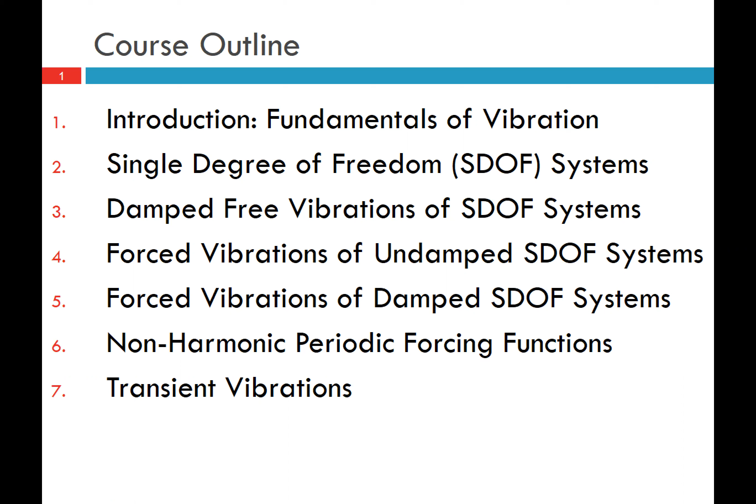So this lecture series will cover 12 chapters. First, we will look at an introduction to vibrations. We will study single degree of freedom systems, damped free vibrations of single degree of freedom systems, forced vibrations of undamped single degree of freedom systems, forced vibrations of damped single degree of freedom systems, non-harmonic periodic forcing functions, transient vibrations.

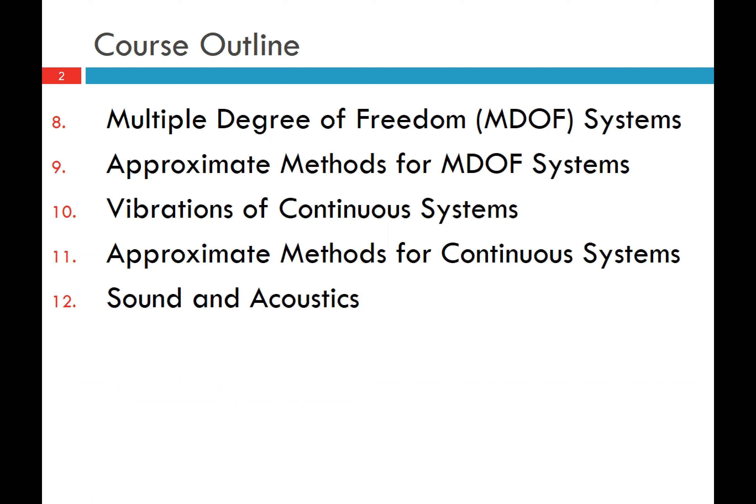We will study multiple degree of freedom systems, as well as approximate methods for these multiple degree of freedom systems, vibrations of continuous systems and approximate methods for continuous systems, and then leave off with an introduction to the concepts of sound and acoustics. So this video is an introduction to vibrations.

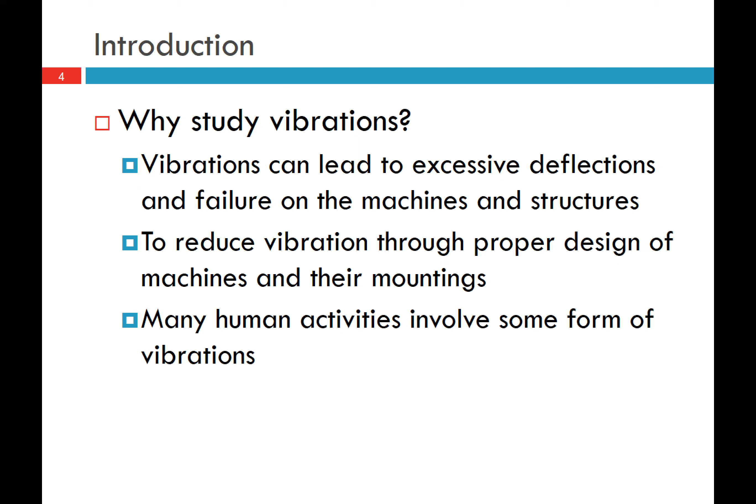So why study vibrations? Well, vibrations can lead to excessive deflections and failure on the machines and structures. To reduce vibrations through proper design of machines and their mountings, it's important that we study vibrations. Many human activities involve some form of vibration. There are also some examples where things have gone quite wrong in various structures due to excessive vibrations.

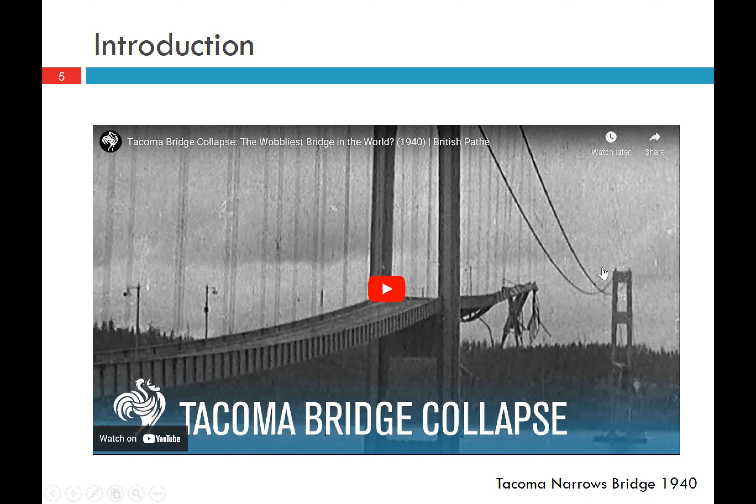So I'm going to show a video here. This is an example of a very famous bridge collapse, the Tacoma Narrows Bridge, which collapsed in 1940 due to excessive vibrations induced by the wind. So I'll just play the video here too, so you can see what happens.

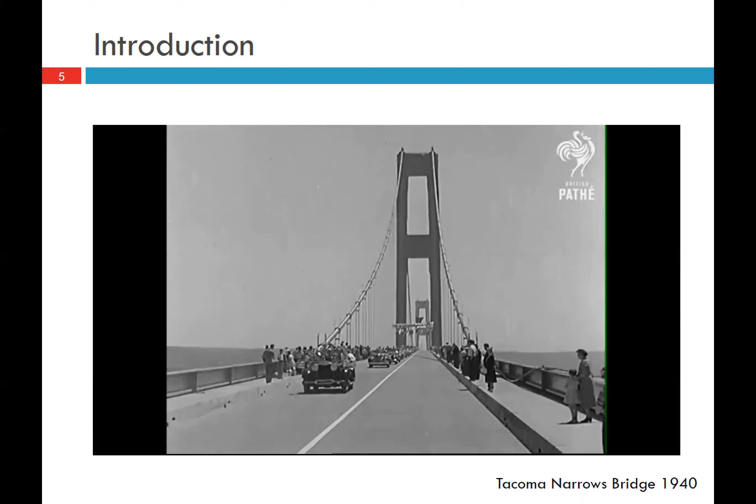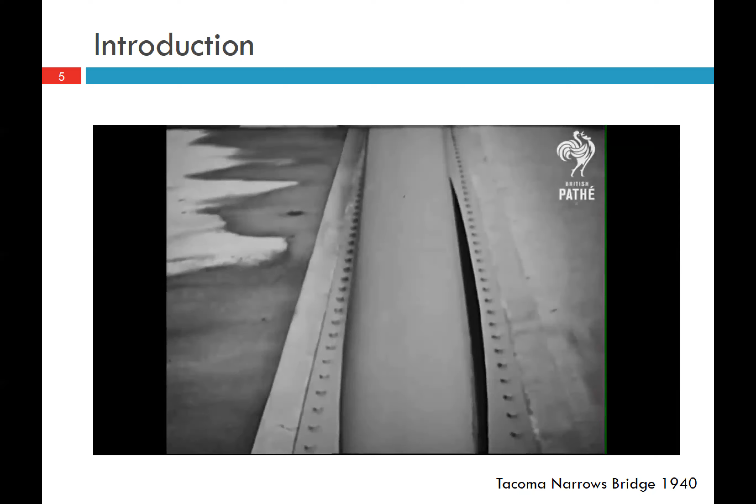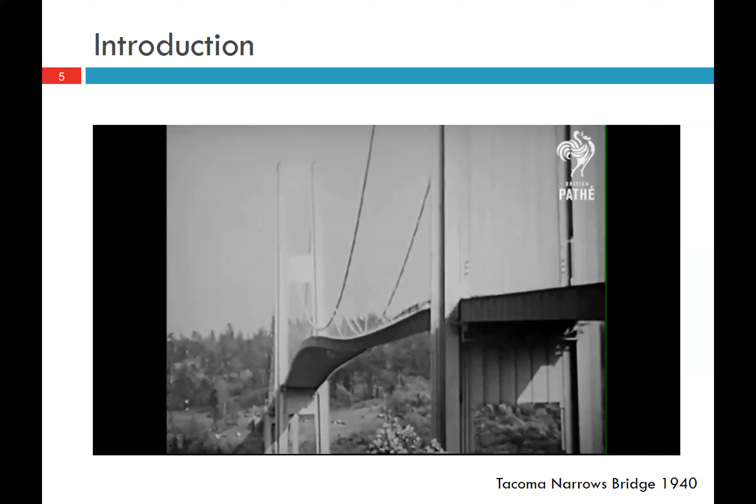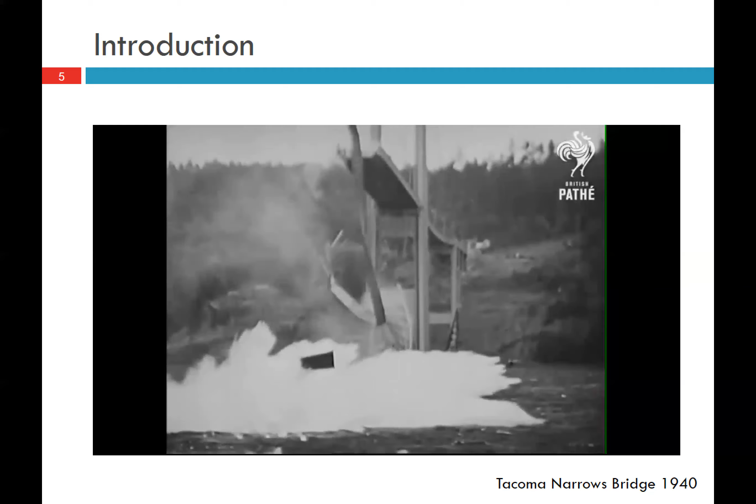Tacoma Bridge, Washington, opened only a few months ago, was built at a cost of over $6 million. But misfortune overtakes the great structure. These are some of the most amazing pictures ever recorded by a newsreel. The actual collapse of the world's third largest suspension bridge. Only a 35-mile-an-hour wind is blowing, but this apparently sets up a rhythmic swinging of the bridge, which increases with each swing. Finally, the swinging road and the suspension cables give way and plunge into the water below. Fortunately, the only casualties were a car stalled on the bridge and a dog.

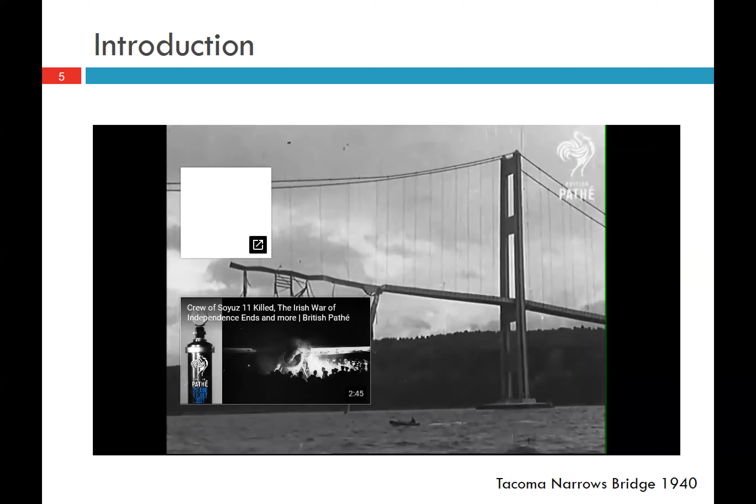So you can see that it's important to have a good understanding of the dynamic behavior of these structures when designing them, and in order to keep the design safe. Here's another famous example. This is the Millennium Bridge in London that opened in 2000. So it was a pedestrian bridge.

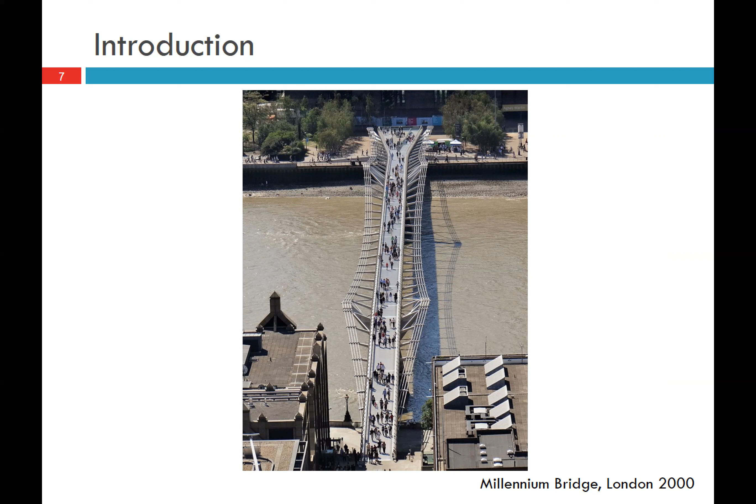The bridge's movements, and I'll show the video in the next slide. But when the people started walking across the bridge, the pattern of their steps introduced some sway in the bridge, and then people started kind of walking in step with the frequency of the vibrations, which just continue to maximize the sway of the bridge. And so you can see what happened there. So let's just play this video.

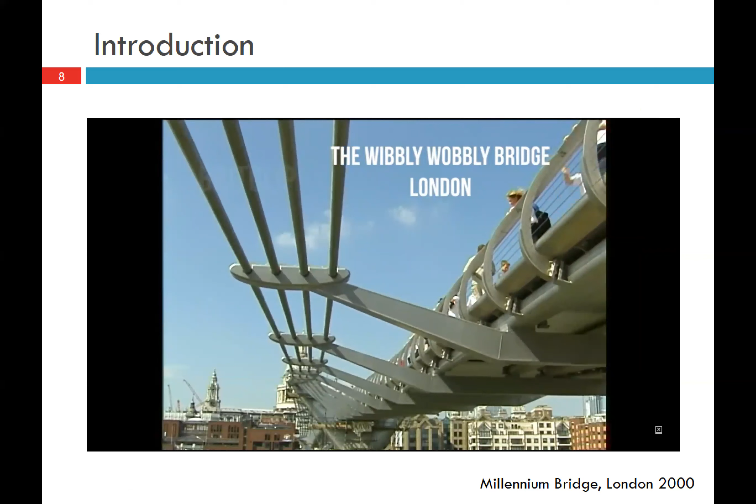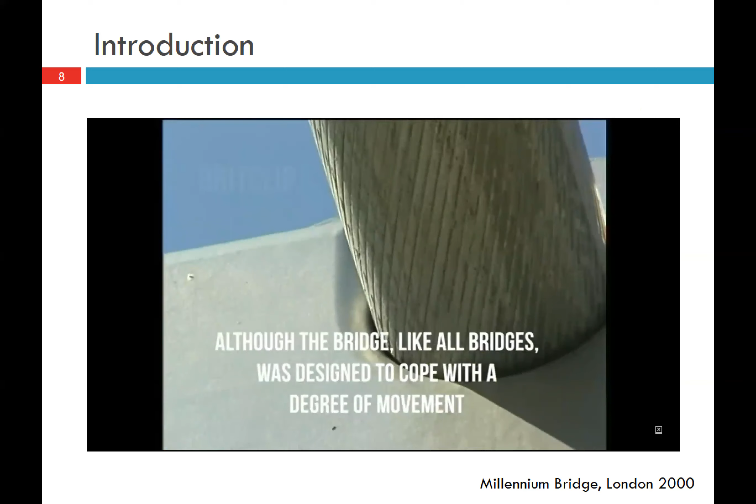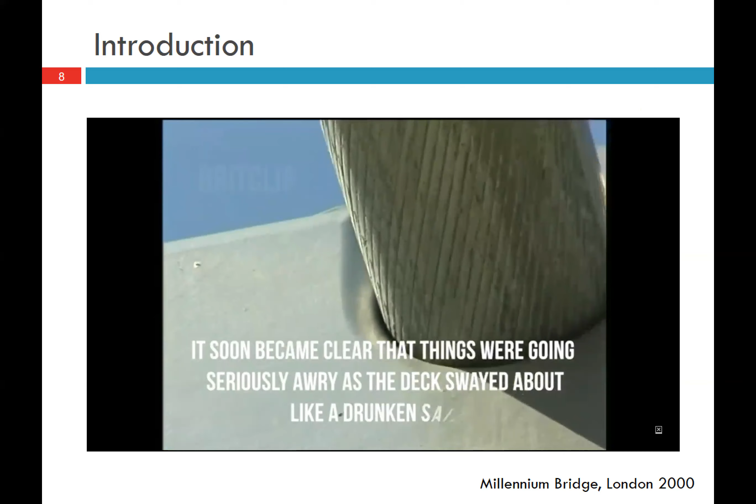So those are some examples of when it's important to understand vibrations to keep things safe, so we don't have excessive vibrations. In other situations, it's useful to understand vibrations as a necessary feature. So we need to understand vibrations for both extremely large structures as well as very small structures. So for example, in like a MEMS circuit, understanding vibrations and using vibrations is really important for their function.

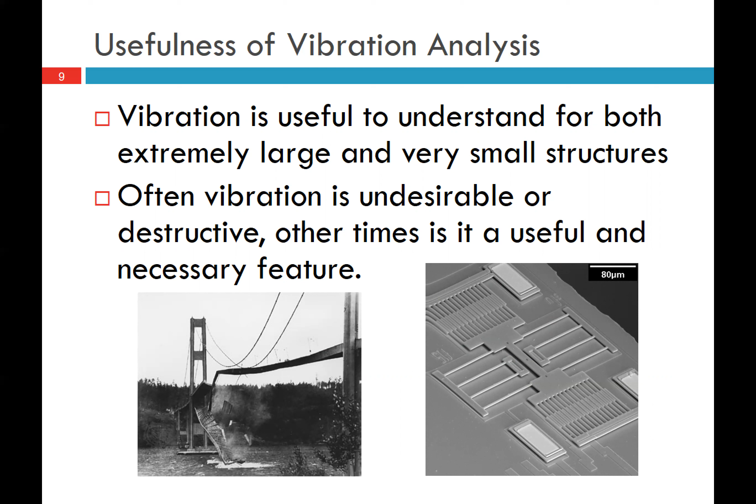So in many of these cases, the goal of the engineer is to minimize or reduce the level of vibration, or design the machine or structure to withstand the vibrations to which it will be subjected. So we can think about things like shock absorbers, vibration isolation systems, etc. Other times we need to actually increase the vibrations, for example, in sound systems, accelerometers, clocks, vibration conveyors, and MEMS systems.

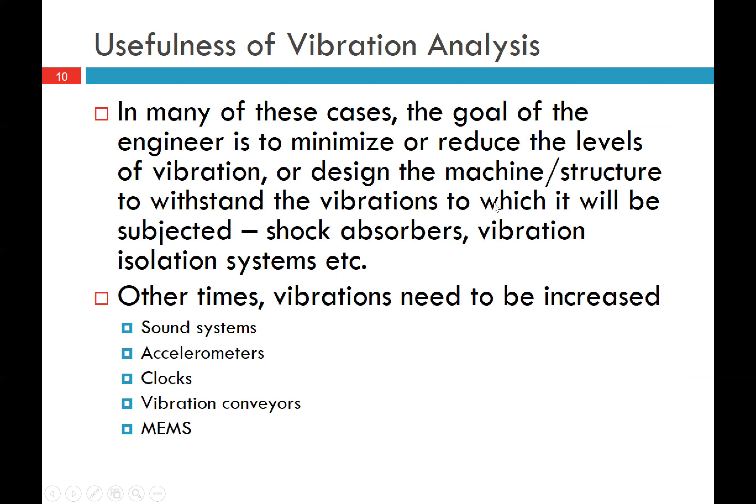There are lots of applications of vibration, as we've seen in bridges, in structures, so tall buildings, in machinery, rotating machinery, in understanding the effect of earthquakes on structures.

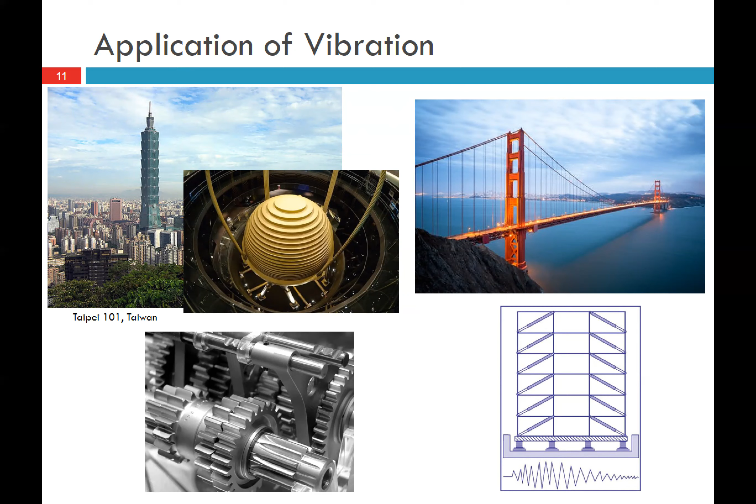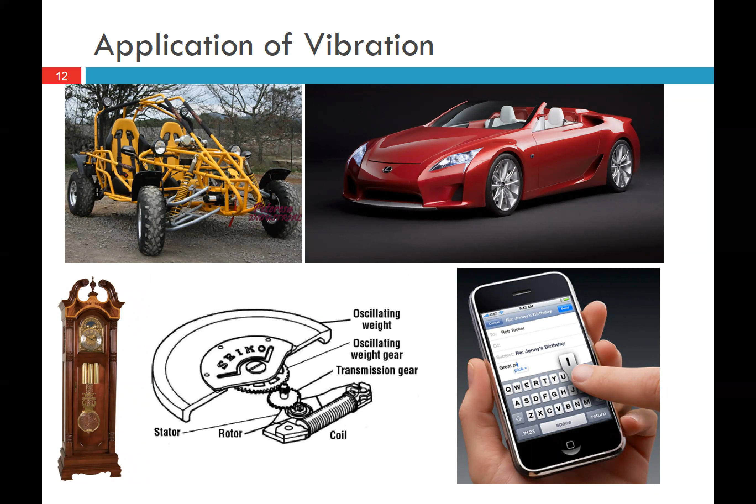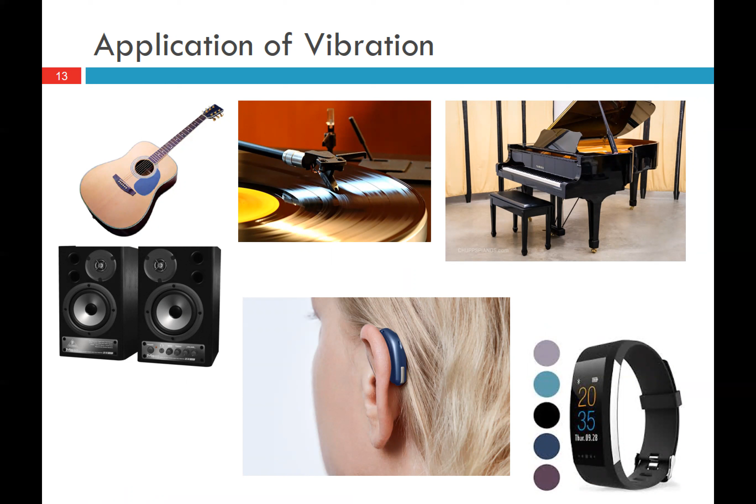Other applications of vibration are in automotives, in clocks and watches, in various electronics. Of course, there's application of vibration in sound and acoustics, sound systems, musical instruments, as well as hearing aids or hearing amplification, and in motion or activity trackers like Fitbit or other types of trackers, all use vibrations in some way or another.

So a bone conduction hearing aid, if a patient cannot tolerate a traditional in-the-ear hearing aid, you can put a small screw in the bone behind their ear and attach the sound processor there. So the sound is conducted to the cochlea through vibrations in the skull. And this connection is achieved through something called osseointegration, where the bone actually grows onto the implant and they become connected together.

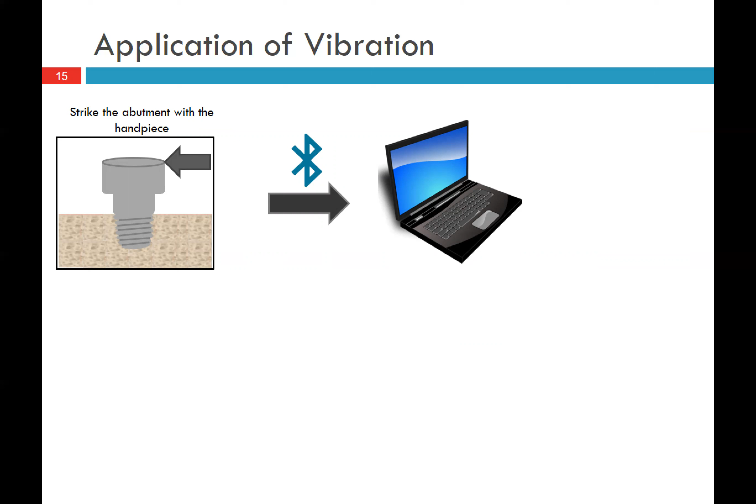So one of the applications of my research is to use vibration analysis to understand how well integrated these implants are. So with these types of implants, there's always something that pokes through the skin that we can access. So in this case, it's the abutment that you attach the sound processor to. So we can strike this abutment with a handpiece that can measure the acceleration response.

So we get something that looks like this for the acceleration response, and this is a free vibration response of the system. We can use the techniques that we're going to learn in this course to develop an analytical model of the system, where we have things like the mass and the inertia properties of the implant and abutment system. We've got some estimates of various stiffness parameters, and the only unknown in the system is the stiffness of the bone implant interface, which we want to determine.

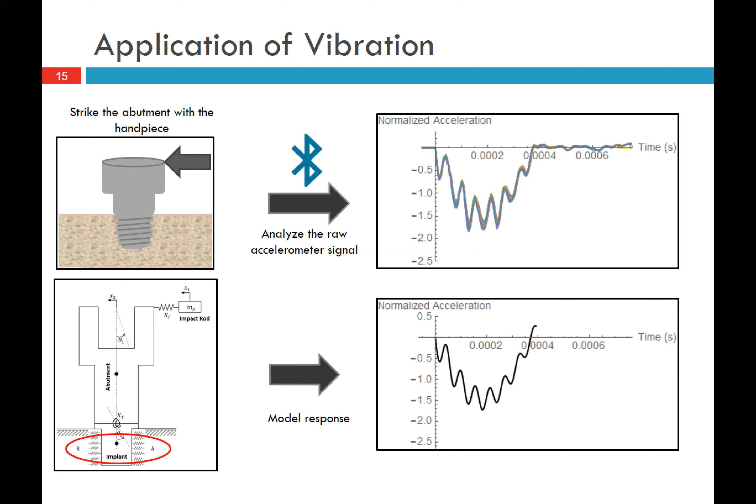So then we can use numerical analysis techniques to actually take the model response, so the acceleration of the impact rod from the model, and match that to the acceleration that we actually measure from the physical handpiece. And this gives us an estimate of this interface stiffness that we want to know.

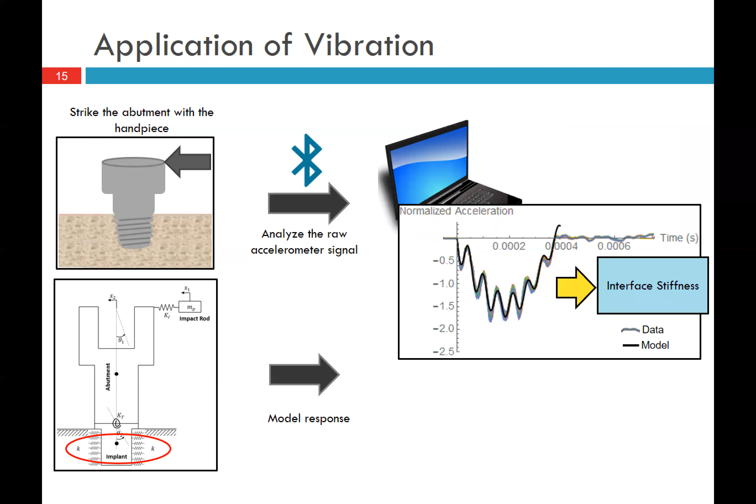And this is just a video showing a finite element model, a dynamic simulation of this same technique, where this is the abutment and this is the impact rod striking it. So you can see what happens under this dynamic analysis, and this finite element model was used to help to evaluate our analytical model.

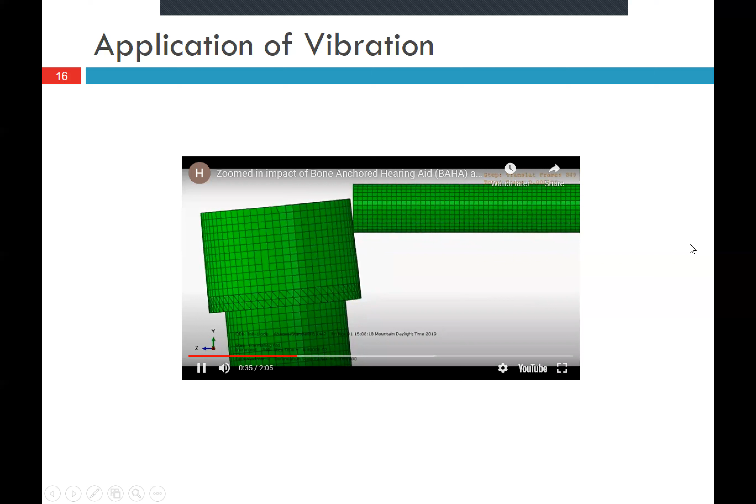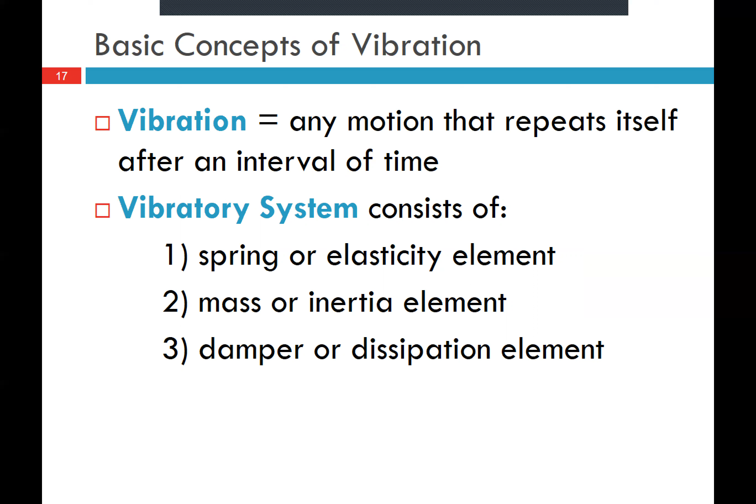So let's talk a bit about the basic concept of vibration. So vibration is any motion that repeats itself after an interval of time. So a simple vibratory system consists of a spring or some sort of elasticity element, a mass or some sort of inertia element, and a damper or some sort of dissipation element. And it involves the transfer of potential energy to kinetic energy and back again.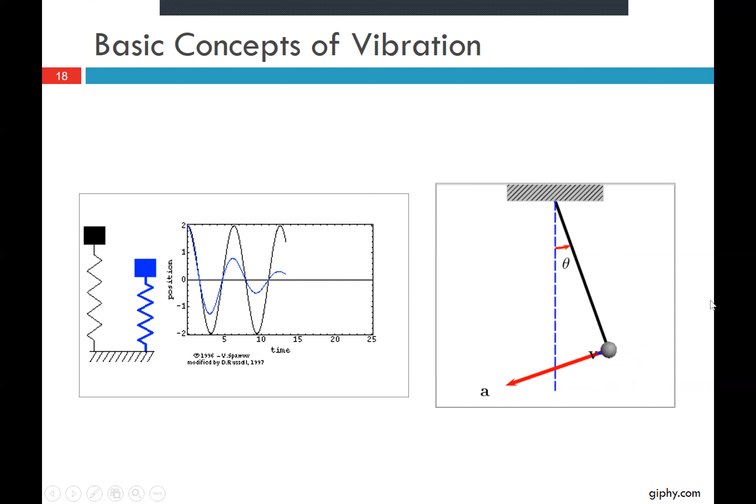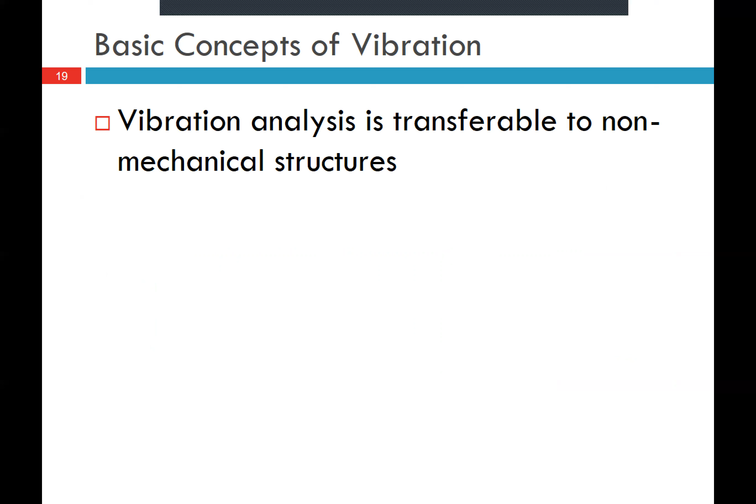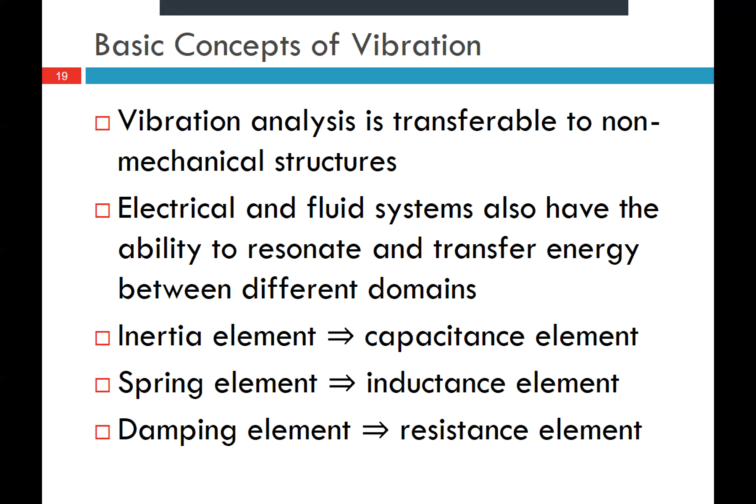So vibration analysis is transferable to non-mechanical structures, even though we're going to focus mostly on mechanical structures in this course. Electrical and fluid systems also have the ability to resonate and transfer energy between different domains. For example, an inertia element is analogous to a capacitance element. A spring element is analogous to an inductance element, and a damping element is analogous to a resistance element.

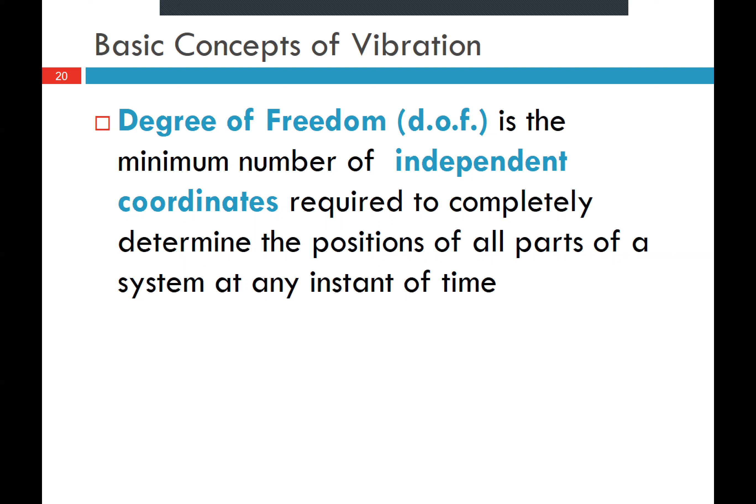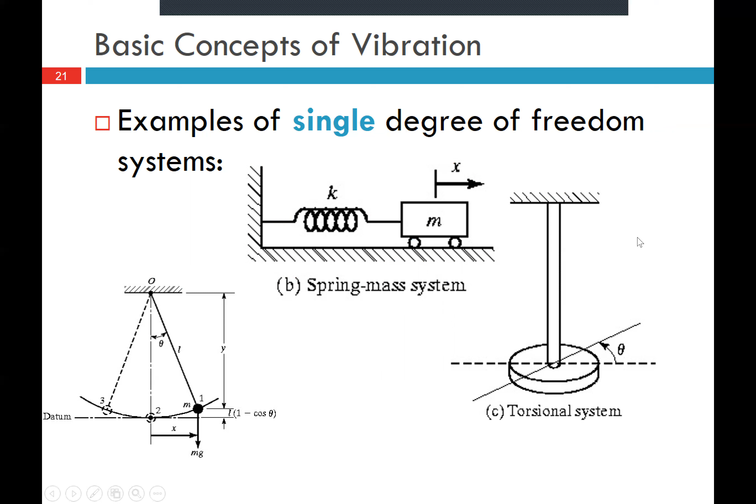In a simple pendulum, we have this rotational motion where the coordinate theta can completely describe the position of our mass at any given time. So a single coordinate means it's a single degree of freedom system. We can also have a different type of rotational motion, like a torsional system, where again, this angle theta is enough to completely describe the position of this inertia element, or this mass at the end of this rod, at any given time. So if we have a single coordinate that can completely describe our system, we have a single degree of freedom system.

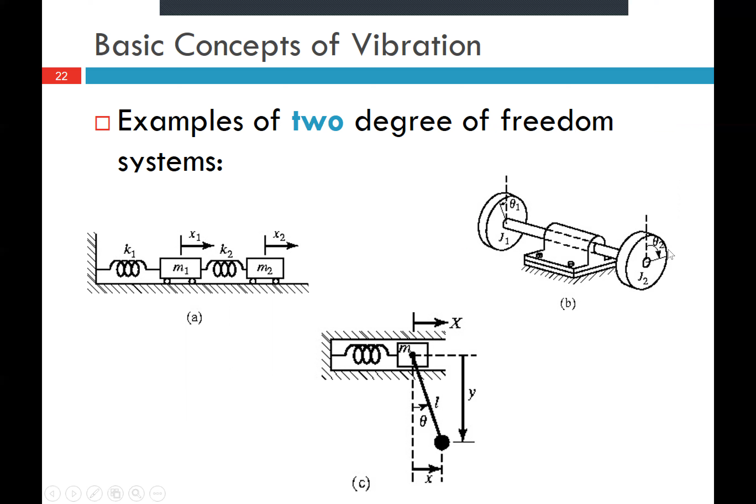If we need two coordinates to completely describe our system, then we have a 2 degree of freedom system. So these are examples of 2 degree of freedom systems, where here I would need, for example, the position of both mass 1 and mass 2 to be able to fully describe this system. Here we can also combine rotational and linear motions or coordinates. So here I could have the position of the mass X as well as the rotation of this pendulum theta to completely describe this system. And here we can have, say, 2 different angles, theta 1 and theta 2, to describe this system.

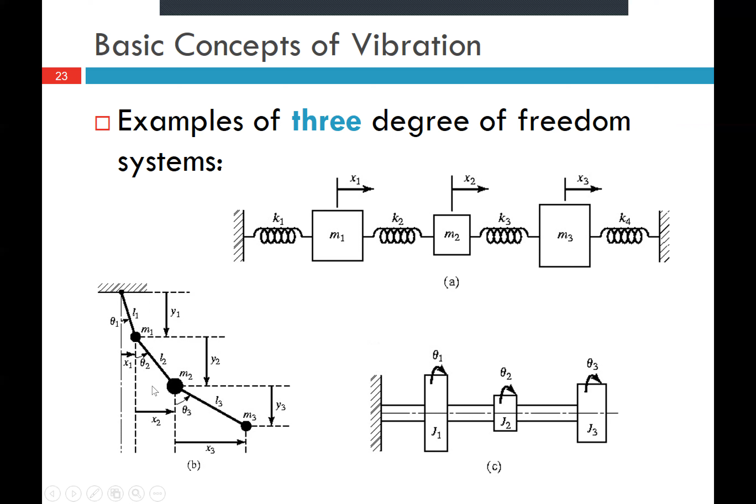And if we have an infinite number of degrees of freedom in order to describe our system, so for example, a cantilever beam may fall into that, then we actually have what is called a continuous system or distributed system, if an infinite number of degrees of freedom are required. So the first ones that we saw, where a finite number of degrees of freedom are used, those are termed discrete or lumped parameter systems.

In general, we can get more accurate results by increasing the number of degrees of freedom that we use. But it's important to note that we always want to use the simplest system possible that is able to describe our physical system. So single or multiple degree of freedom systems can do an excellent job of describing many systems, even though they are continuous in real life. But there are some systems where we need to model it as a continuous system, and we can do that. And we will talk about different methods for those types of approaches.